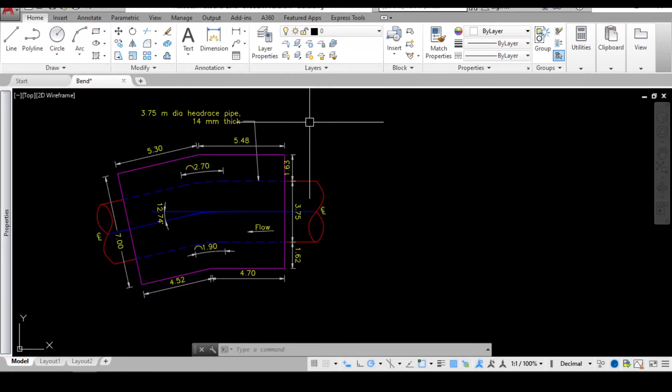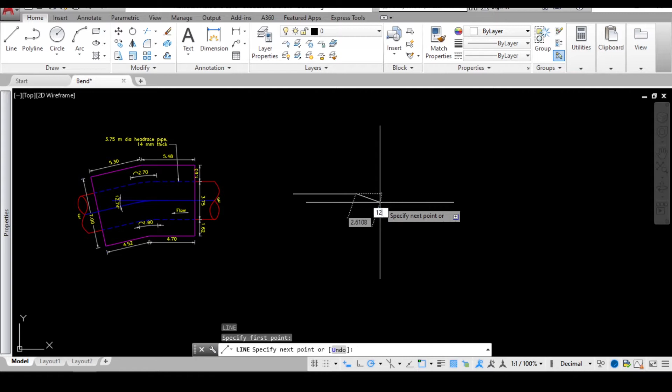Today we will be doing a bend drawing, and for the drawing I'll be preparing this anchor block, and in this we have an angle of 12.74 degrees. So I'll just prepare a straight line, a random line, and again I'll draw a line, a random line, and for this line I'll draw a second line at an angle of 12.74 degrees such that it will match the same.

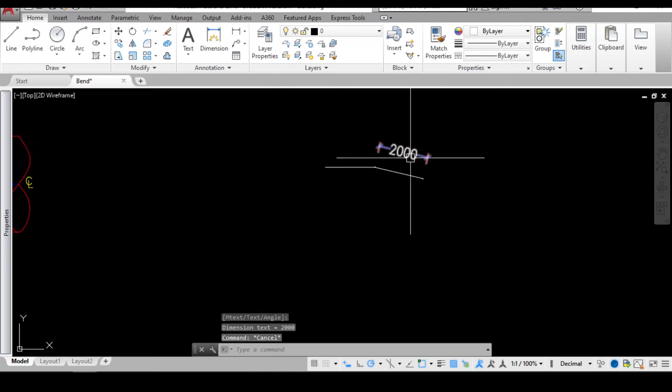And in this I'll use the lengthen command and make it a length of 2 meters for both parts, and this 2 meter line I'll keep as the middle line. And if you check, the diameter of the bend is 3.75 meters, with a thickness of 14.

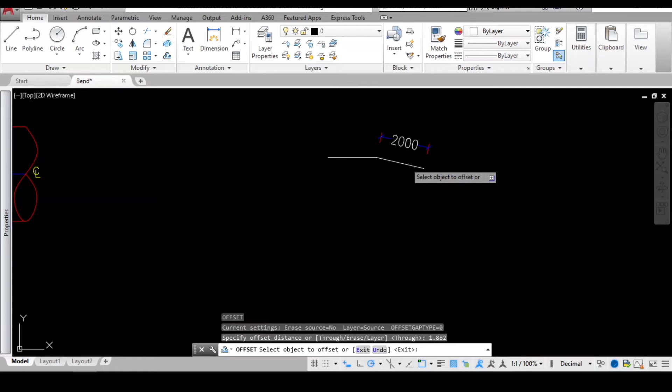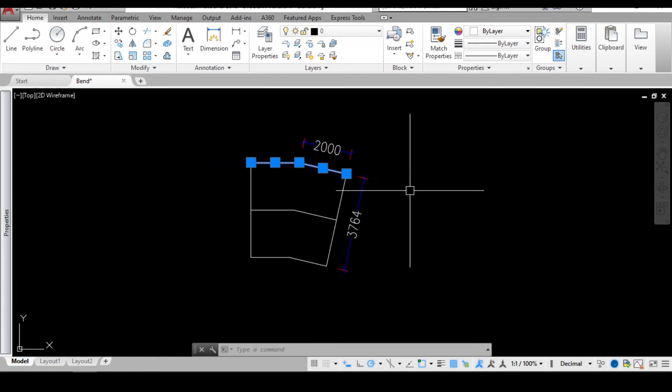So I will offset this line to a value of 1.882. Again I'll offset this line further. Then we fillet all this, and I'll just join this line. If you measure this, it will be 3.764. We need a middle line to prepare the flattened drawing, so I'm using this 3764.

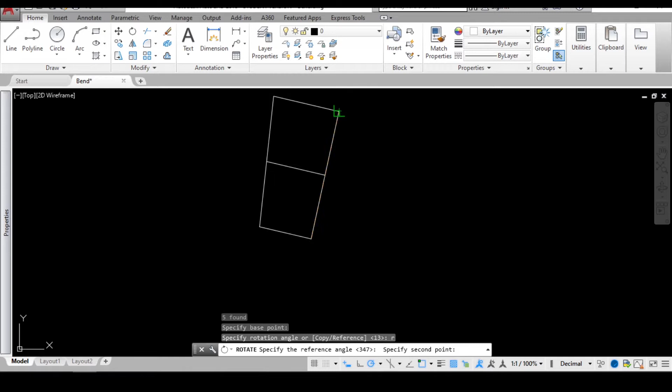Before finalizing this drawing, we'll just prepare the sheet fabrication drawing. For that, I'll just copy this to the right side. Then I'll rotate this. I'll just change the color of the middle line so that it will be easier to see. And then I'll just

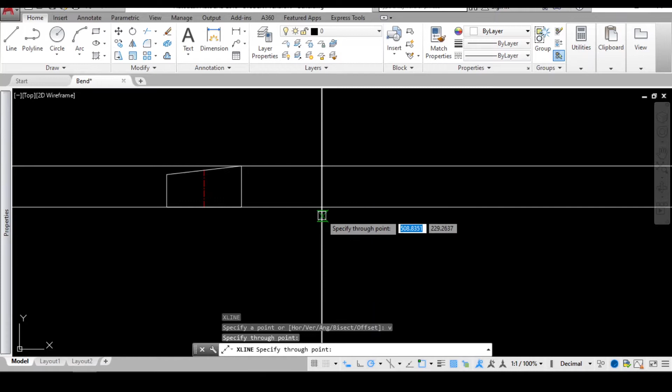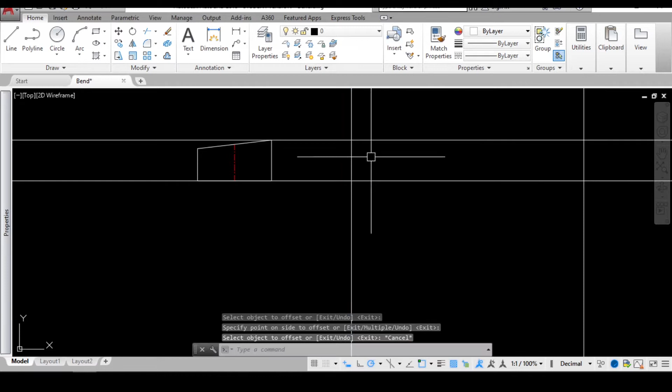create an X line for these two edges, and I'll draw a vertical X line, and the length of the sheet will be equal to the circumference of this value, and that will be 11824.95, rounding it off to 11.825. I'll just trim all the edges. This is the strip of the plate that we need to cut and roll so that we'll get this segment.

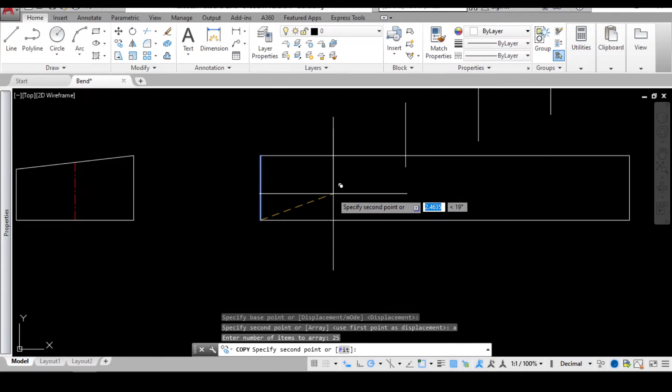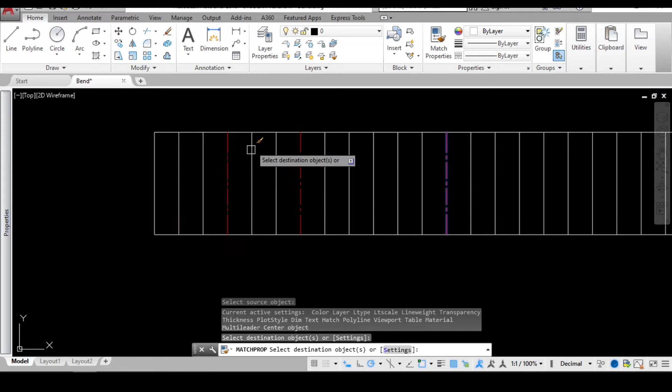Now I'll just select this line and copy it, and I'll use the array feature here, and I'll array this to a value of 25, and I'll press F for fit. Doing this, we'll divide this strip into 24 segments. Now I'll just mark the center line. This is the center, and if you count 6 from here, then we'll mark this line also. We need to do this so it's divided into equal parts. From here to here is equal, and from here to here is equal, and it's divided into 4 quadrants.

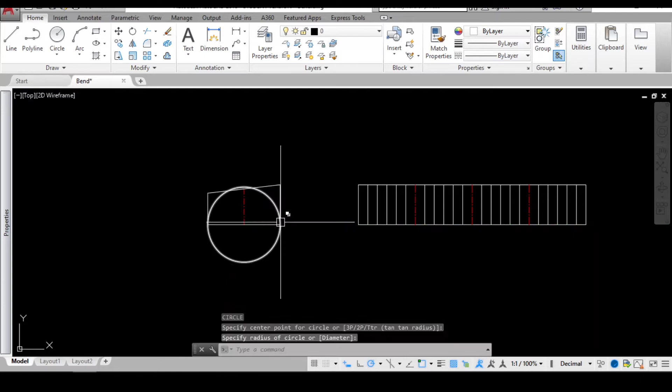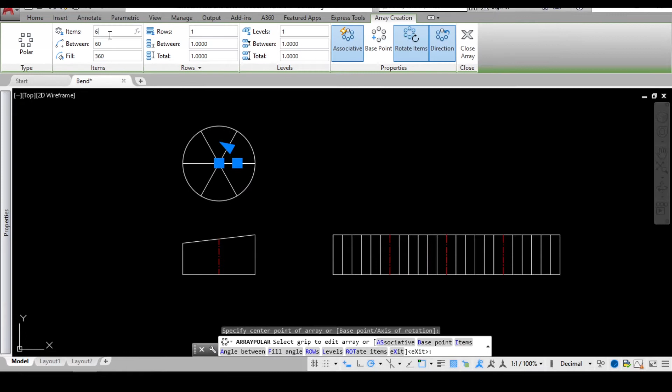And now I'll create a circle for this pipe, and I'll just move this a little bit above, and I'll create a line for the circle, and I'll trim the extra unwanted parts. And for this line I'll use the polar array feature, and I need 24 items for this. We're doing this so that we will divide this segment into 12 parts, and then I'll just

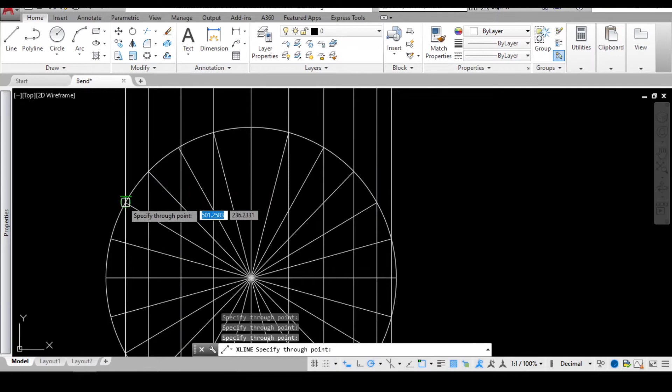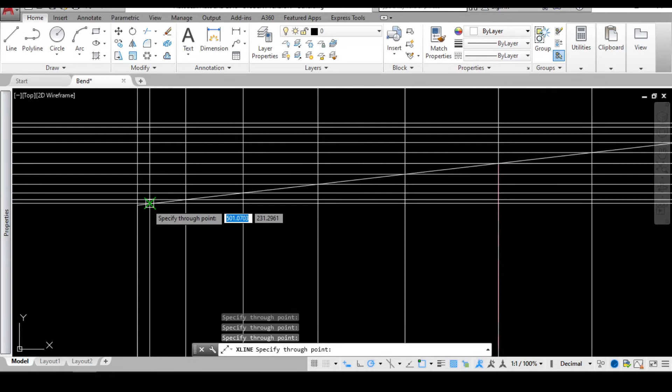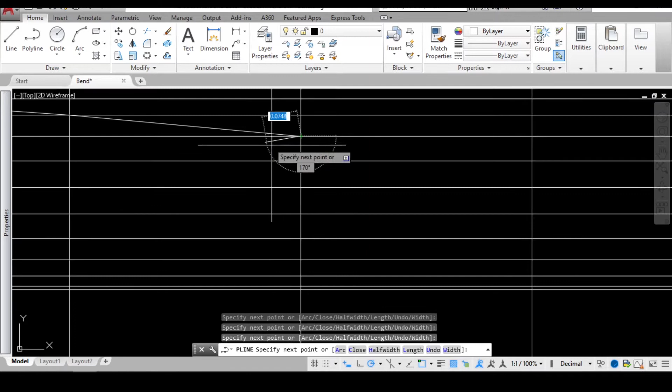After this, I will again create a horizontal X line for all the intersection points. Then we need to connect all lines from here to here. This is the first line, and for the second we'll create a line to the next intersection point, that is here, and then similarly to the next intersection point, and so on till the last point.

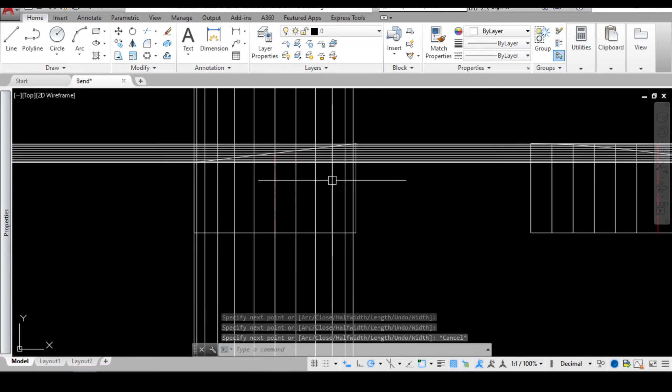If you did this correctly, then the center line and the lowest line will be exactly the same. So I'll just delete both of these. In this also you can see the bottom line and the center line are the same. And for this I'll just select mirror. The cutting profile will be through this, so that we'll get exactly this segment of the pipe.

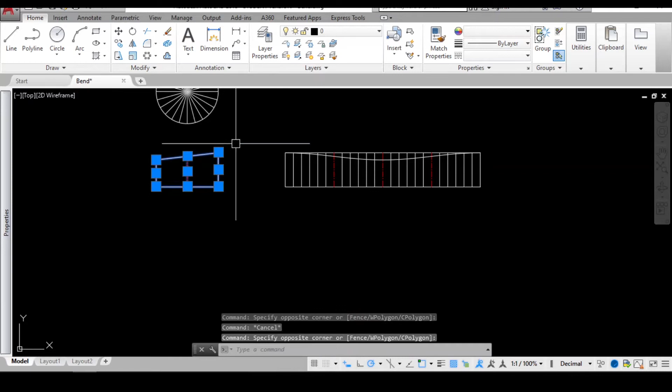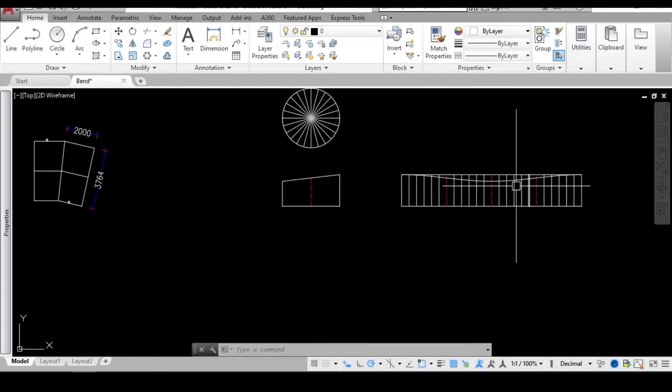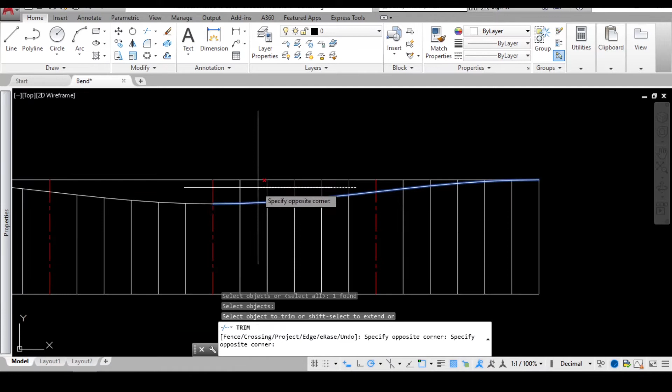And for the welding, we generally use the opposite direction. So if we weld this segment for the first part, for the second part we'll need to weld the opposite part of this, so it will be the smaller one. And if you see this cutting profile, you will just trim the unwanted lines in the middle. Similarly on the other side also.

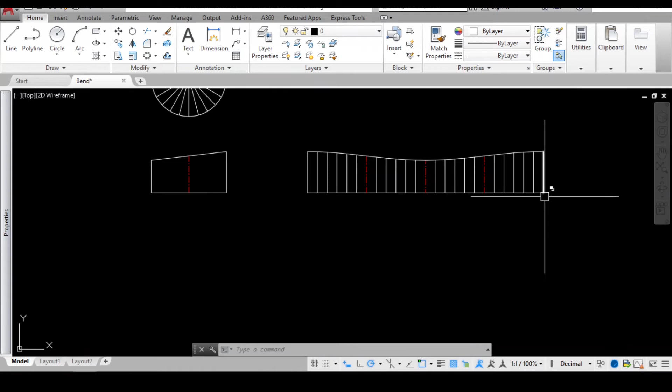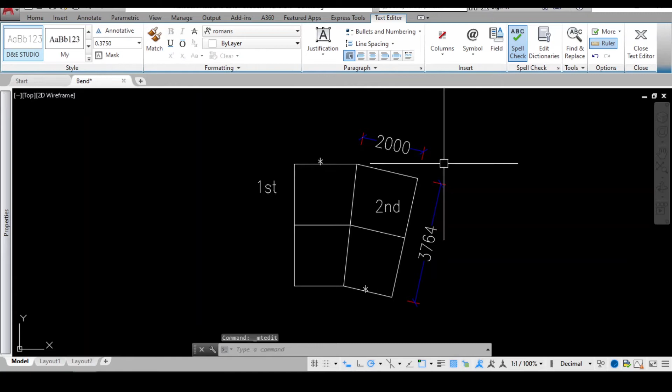And if you see this drawing, I'll delete this part also, you can see the smaller part is in the middle and the longer part is at the edge. That means the longer part is to be welded in this part. So if we name this segment as first and the other one as second segment, the drawing that we drew before will be the first segment.

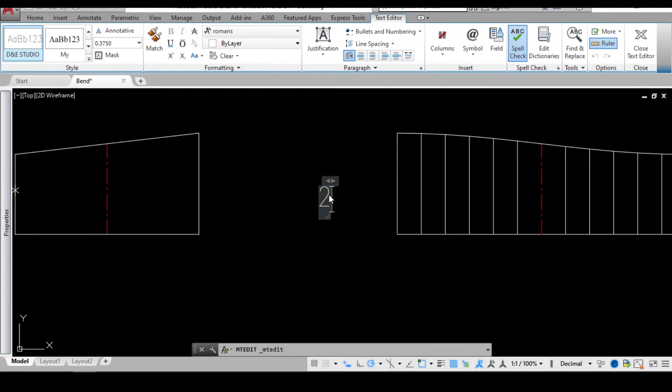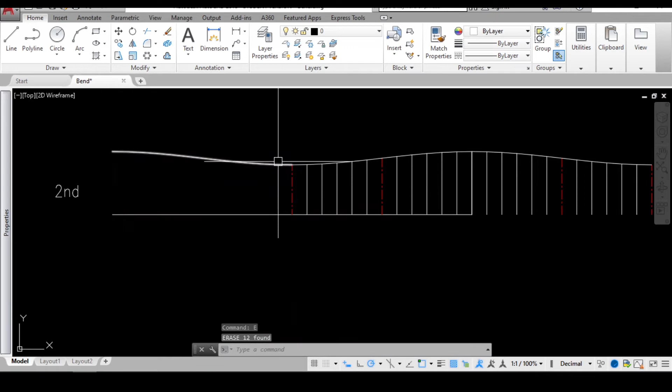And the second segment is exactly a mirror. For the second segment, the weld seam line will be in the opposite direction, and I'll just rename this. For that we need to weld in the smaller part. I'll just copy this from the center line, and I'll delete it till here.

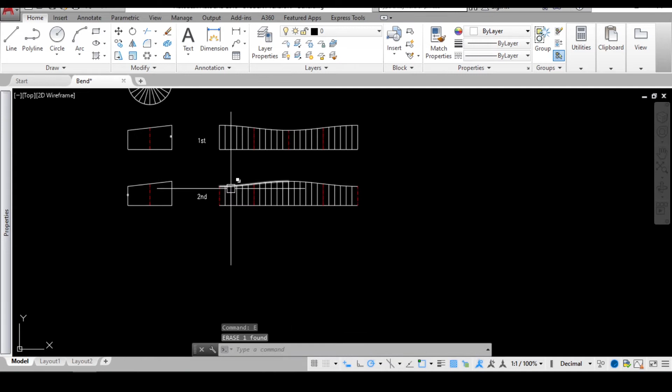For the second segment, if we keep it in the same line, both will be of exact length. For the first segment, the longer part is to be welded, and for the second segment, the smaller part is to be welded. I will just change the color of these edges. And for the dimension, this is of the same dimension.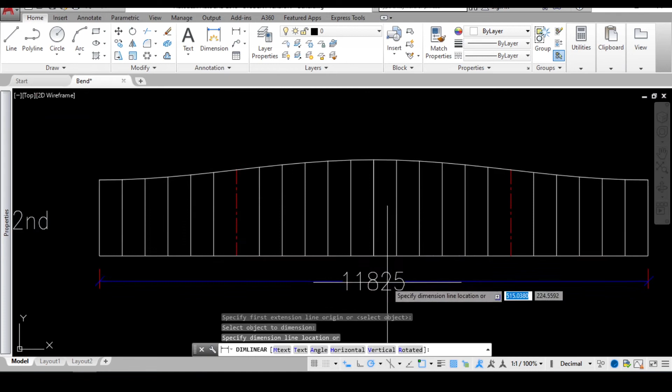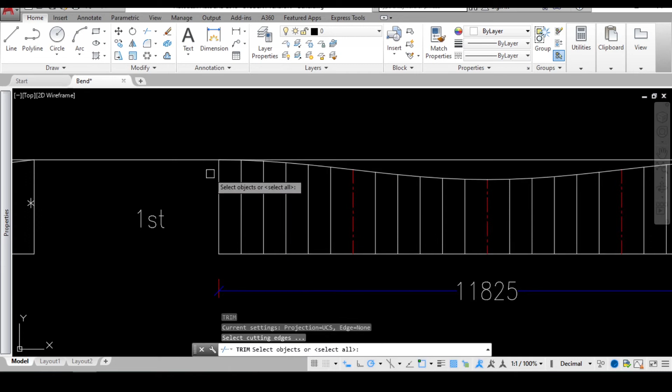And if we give the edges, I've created it for the 2000 mm strip plate, and the smaller distance is about 1580 mm. We need to give the cutting profile; we need this dimension to draw it in the plain sheet so that we could cut the sheet. That's why we need to give the dimension for all these values.

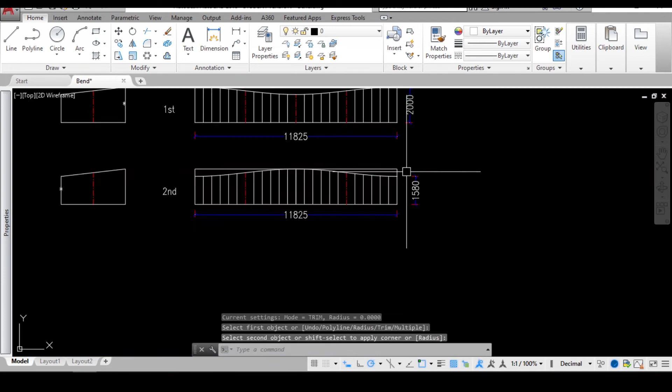Similarly, I'll just create a line for the second part also. And regarding the dimension, if we measure the overall dimension from here, this will be 2000 mm only, and the remaining dimensions we need to give from all these center points.

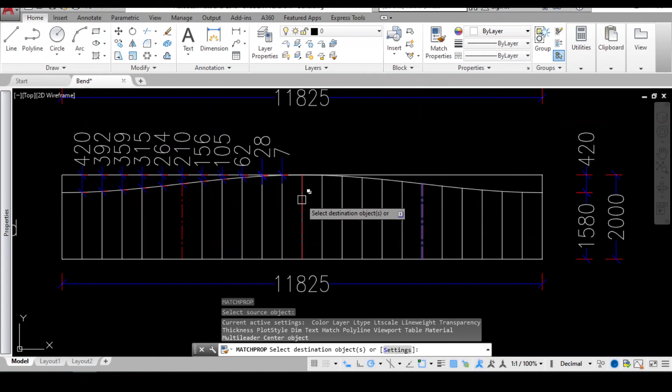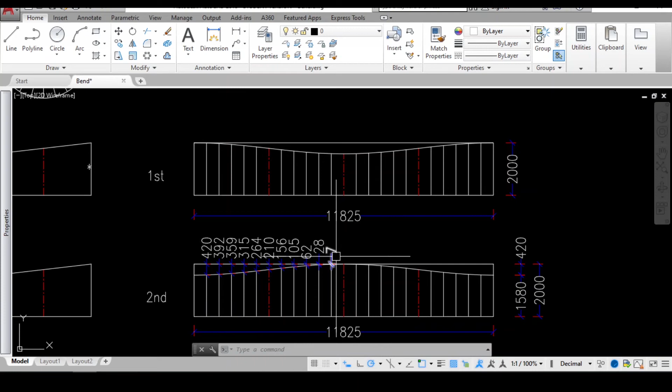The dimension for the second part will also be the same. The middle line is changed. The dimension of this will be similar to the dimension of this side also. Actually, here the dimension will be the same, but in the opposite direction. From here we have the 7 value in the middle, but in this we'll have the 7 value at the edge. That is the only difference, and the rest is all the same.

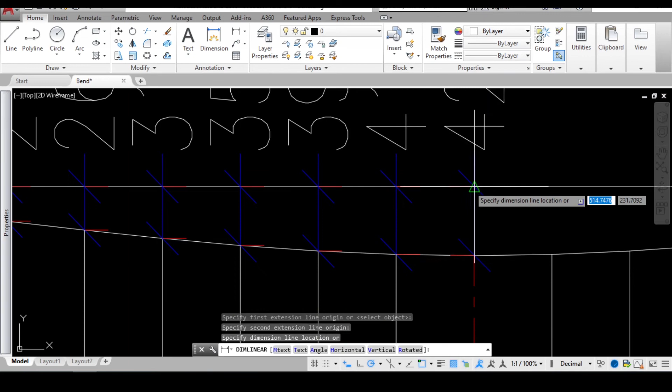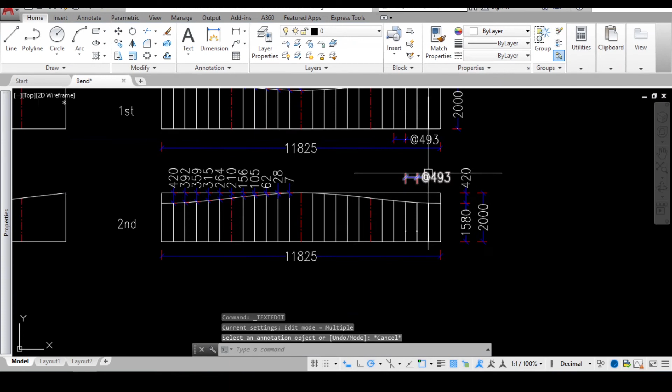These two will be the cutting diagrams for the bend, and we need to give these dimensions so that it will be easier to mark on the plate. This value will be the same for each segment, and I'll just make it a little smaller so that it will be easier to see.

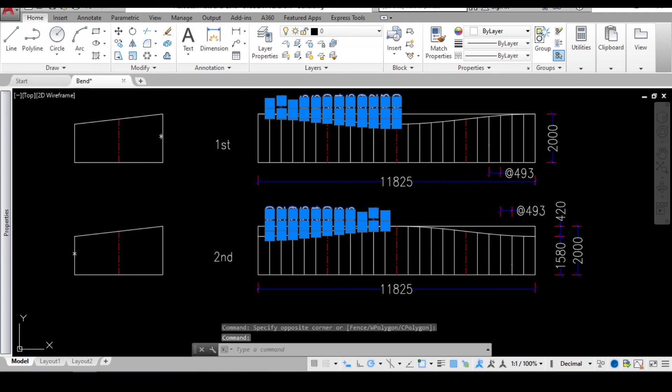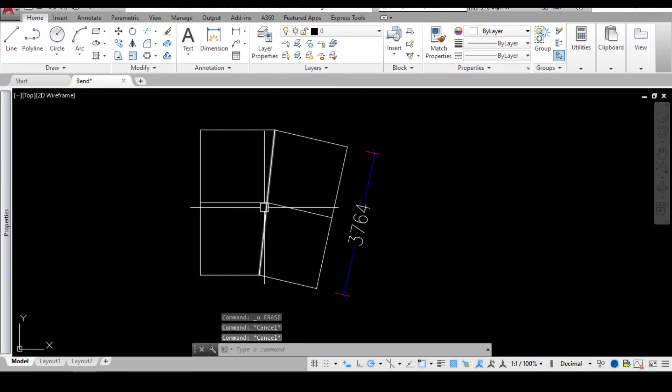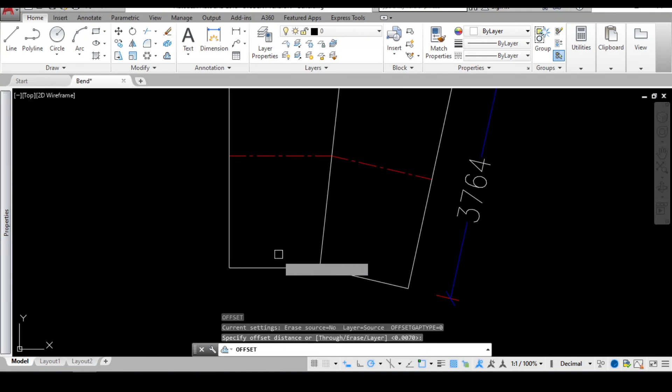And for this drawing, I'll create a final drawing so that we can place it in the anchor block. I'll delete this dimension and the seam lines of all the segments. This line is the center line, so I'll change the color of this center line also. And we need to offset this line 7 mm to the inner and 7 mm to the outer, and similarly on the bottom side also.

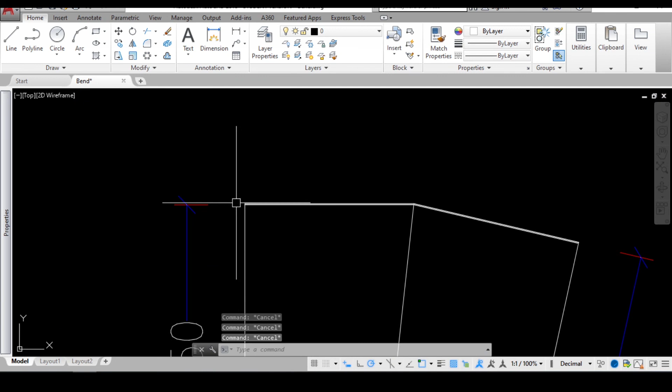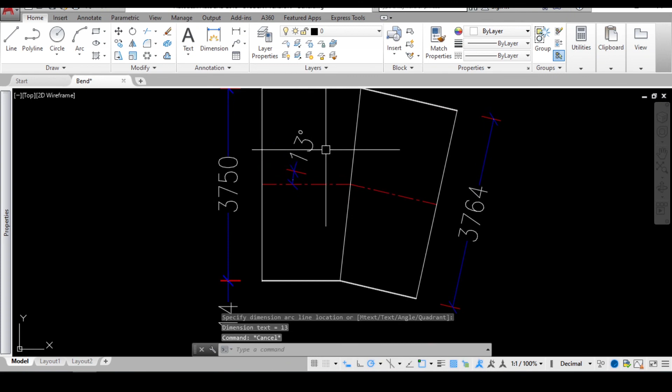So if you measure both inner lines, that will be around 3750. That is the required diameter for the pipe, and the thickness is 14 mm. And we need to give an angle for this also. If you measure the angle, this is showing as 13 degrees, but if we change the decimal point, then it will be exactly 12.742 degrees.

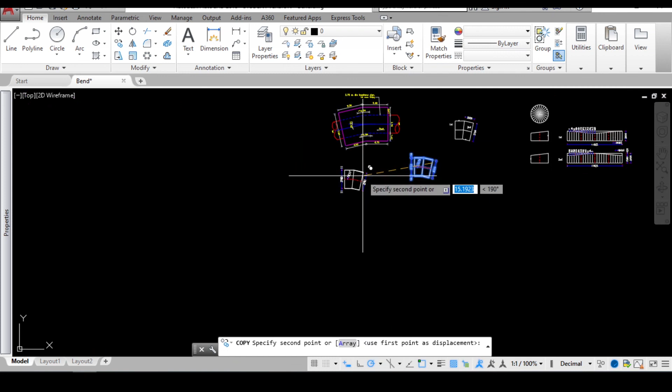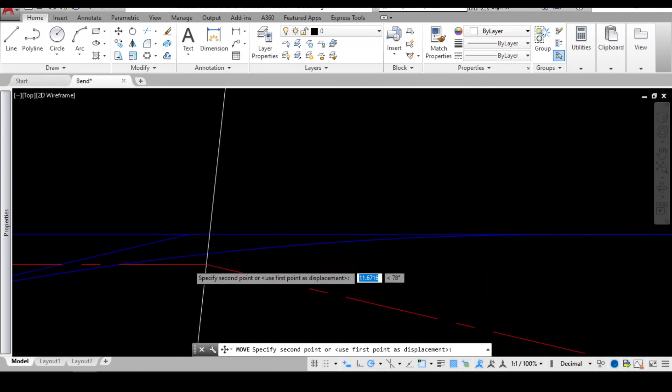I'll just copy this to the next. To place this in the anchor block, I'll delete all the unwanted dimensions. I'll select all the drawing and make a group of it. After making the group, I'll move the drawing from the center line and place it in the center of the anchor block.

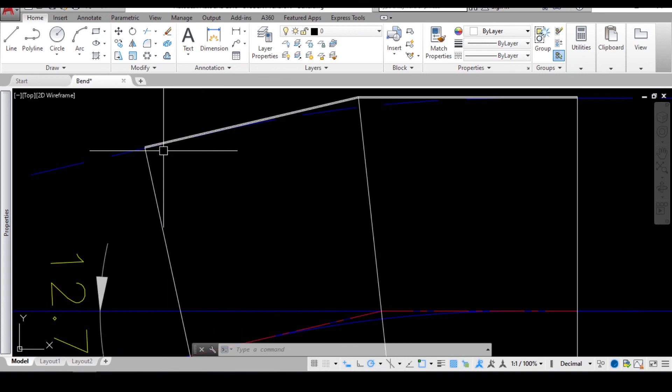Then I'll select the group and rotate it so that it matches the anchor block drawing. And if we see, this drawing is perfectly matched as per the anchor block drawing.